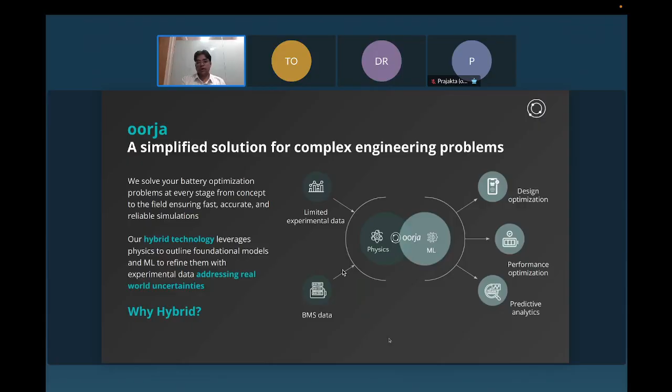And we started by solving it for batteries because batteries are one complex engineering problem where an interplay of a lot of physical phenomena happens. Be it the thermal characteristics of the cells, the structural design of the cells, or the electrochemical models of the cells, all of these combined together dictate the behavior of the cells, and that is where these models become very complex.

And we at oorja solve all these battery problems at various stages, be it warranty stage estimations, reducing the accelerated life testing for the cells, as well as initial performance calibrations and cell selections. For all of these things, what is important is that we have a good cell model, and for a good cell model, we need accurate parameters to represent the cell behavior. Today we are going to focus on the parameter estimation problem.

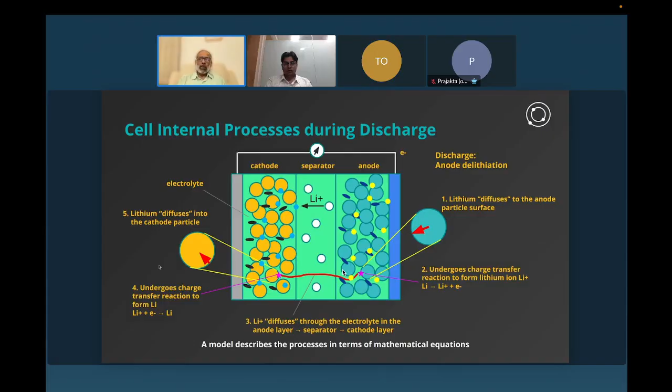What I'm not showing here is also the gradient that's set up by the potential or voltage gradient, and that also drives a similar transport process as shown here. So when we are describing these processes, this is where the model comes in, where the processes that we describe are now described in terms of mathematical equations. You set up equations for diffusion, you set up equations for reaction, and so on. And Prashant will cover in detail what these equations are.

So what is needed to describe this for a model? First thing we need are the material properties. If you look at the cathode side, one is the specific capacity. This is a property of the cathode active material. Another is the open circuit voltage on the cathode side. And then we need the component densities. We talked about the active material, the binder, and the conductive filler. We need the specific gravity or the density of all these components. So this is on the cathode side.

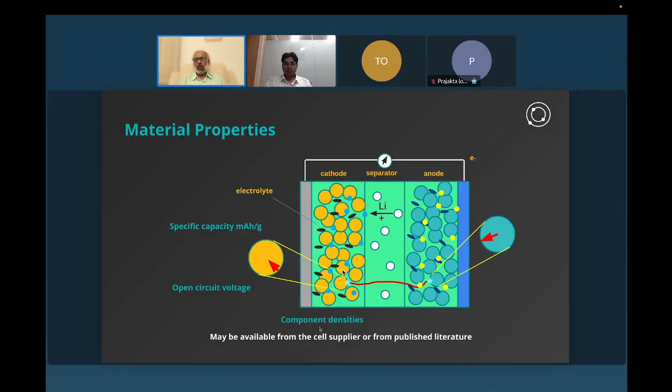Similarly, you need the material properties on the anode side. Where do we get these numbers? Knowing what these are, we can look them up, and the composite components here are definitely available from the cell supplier, or if it's a very standard cathode or anode formulation, you can get a pretty good guess at what they are and get the values from the published literature. So that's the material property.

The next are the design parameters. You need these for the model. These are inputs. What are the design parameters? To the left is the cathode, the particle size of the cathode. In case of an NMC cathode, it's typically about 10 microns. That's a design parameter. And then you have the thickness of the electrodes.

The cathode can vary anywhere between 70 to 100 micron. The separator, which is much thinner than the anode or the cathode, 15 micron. And the anode, typically for a graphite anode, is somewhere between 90 to 100 micron. So the thickness of the three components, the cathode, separator, and the anode, are examples of design parameters. We need to know them.

And similarly, on the right-hand side, you need the particle size for the anode particle, and the porosity, which is the white space in between the particles on each electrode, needs to be known, because when a cell manufacturer produces these cells, these are the set values. They target these values and they manufacture the electrodes, and hence the cell, with these numbers in target. You also need to know the composition of each electrode. What is the weight percent of the active material and the other components?

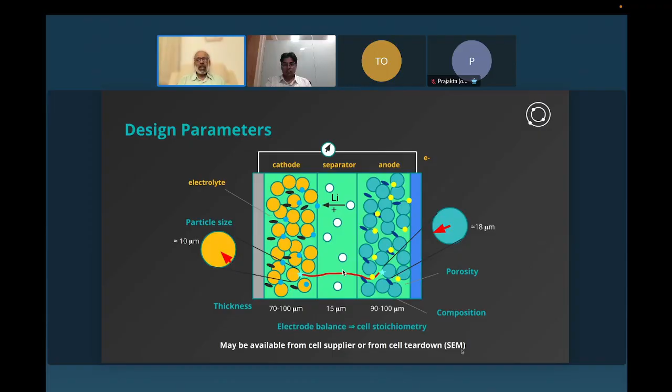So these are some of the inputs, and then going to the next slide, which is the focus of the presentation today, is the reaction and transport parameters. We talked about transport and we talked about diffusion. That's a transport process. And the diffusivity of the particle, diffusivity on the anode, is an example of a transport parameter. And similarly, we talked about reactions, and the reaction constant is a reaction parameter. So we have a set of transport parameters which consists of diffusion coefficients and a set of reaction parameters, which are the reaction rate constants.

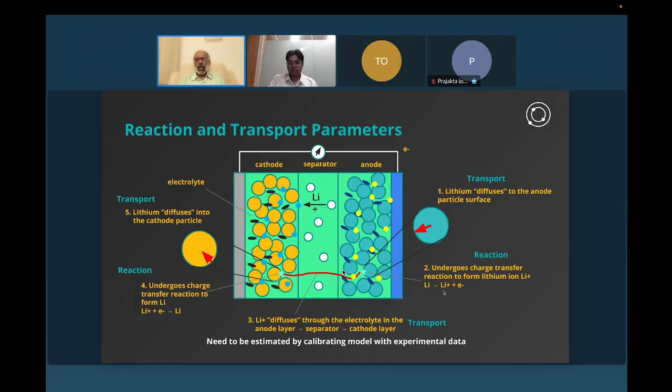These are not easy to estimate. There are reported values in literature, but we simply can't pick them up because they are very sensitive, very dependent on the chemistry and the design and so on. So these are typically determined from experimental data. And these are some of the things that Prashant will highlight in this presentation. So let's go to the next slide.

So if it's an electrochemical model, here are some of the key considerations, especially when it comes to using these models for quantitative predictions. The models we saw, the processes we described, are for simple charge and discharge within a cell. The electrochemical models are often extended to describe the cell degradation. You describe similarly various degradation mechanisms. It could be particle cracking, it could be SEI layer. You build equations describing these, and that then eventually becomes the life model that predicts the life of the battery cell.

You incorporate energy balance into these equations. Prashant will show the equations in a minute. And that leads to temperature predictions. And the model then can be used for thermal management. It can also be used for pack design, including the cooling strategy. So the accurate beginning of life model forms the basis for many models. And getting this model to be accurate is very critical. And the bullets below tell us the key requirements for getting an accurate beginning of life model.

Cell chemistry information: NMC is not good enough. We need to know what type of NMC it is, NMC 811, for example. Cell design data for that specific cell. We need accurate half cell open circuit voltage. This is very critical. And the third bullet item is estimation of the transport and reaction parameters we saw in the previous slide from the experimental data. Again, as I said before, there are values available in the literature. They are only ballpark numbers. If you really want good quantitative prediction, we need to estimate these for the cell at hand and not just rely on what's published in literature.

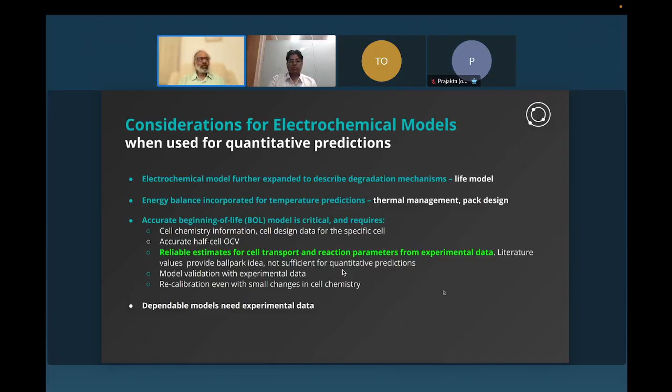Similarly, the anode and cathode undergo similar kinds of processes. And then you have the diffusion and migration happening through the electrolyte, which is sitting in the separator. Now, for all of these processes, one needs to know what is the diffusivity through each of these particles, cathode or anode. What is the diffusivity in the electrolyte? What are the reaction rates once the lithium ion converts into lithium by combining with the electrons? Or what is the reaction rate when lithium decomposes into lithium ion and electrons?

All of these parameters play an important role in describing the cell dynamics, and hence accurate estimation of these parameters is very important to understand, when the cell undergoes the charge and discharge process, what kind of response you would expect from the cell. Now, all of these parameters, like Dr. Raghu mentioned, can be categorized into two categories: cell design parameters and model parameters.

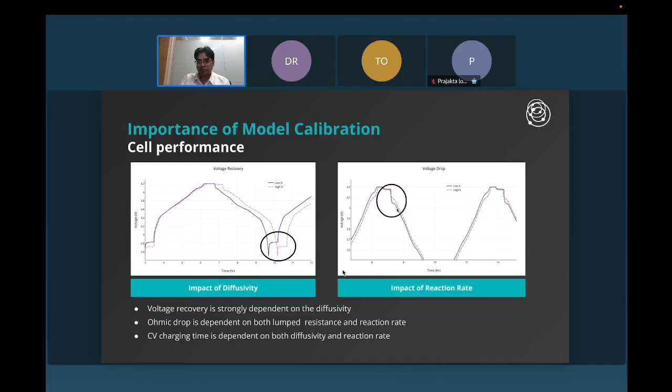And we at oorja have come up with an approach where we make use of the HPPC data to identify these parameters, given that the half cell OCPs as well as the design parameters are known to us. So, like we have seen earlier, inputs required for the model are design parameters, open circuit potentials, and the other set of parameters, as we have seen, are the transport and kinetic parameters. Instead of that, now the input here is HPPC data, and making use of this as an output, we are going to estimate those model parameters.

Now, HPPC data can be obtained by conducting the experiments on the cells that are going to be used, or there are sometimes these databases where you have HPPC tests conducted. But we would always recommend to conduct the experiments on a particular cell which you are interested in modeling, because whatever databases we have may not be the accurate representation for the cells that you are trying to model.

Now, one of the challenges with any experimental data is that the data comes with a lot of noise because of either the sensor measurements or something happening during the experiment itself. Now, that requires a cleanup of the data before we can make use of this data for optimizing these parameters.

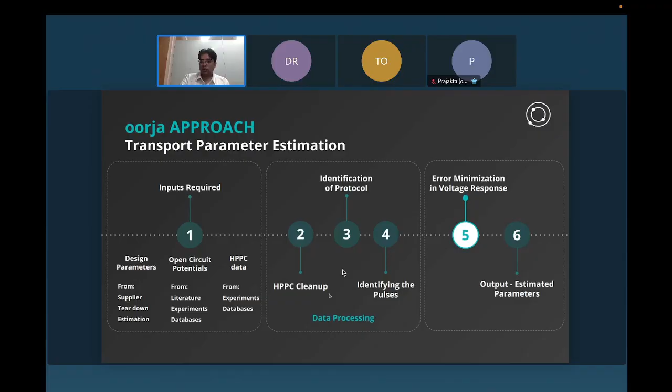So the process after we have uploaded the HPPC data together with the other parameters is that first we perform the cleanup of the HPPC data, and then for the HPPC data there are certain important sections that one needs to look at to understand the cell response, and that is where we have automated this process and we identify these protocols. And once we have identified the HPPC protocol, we also identify the pulse regions, because those are the ones which show us the cell characteristics. And then once we have pre-processed all this data, it is now ready for the optimization of these parameters to match the voltage response that we see experimentally to what we see from the simulations.

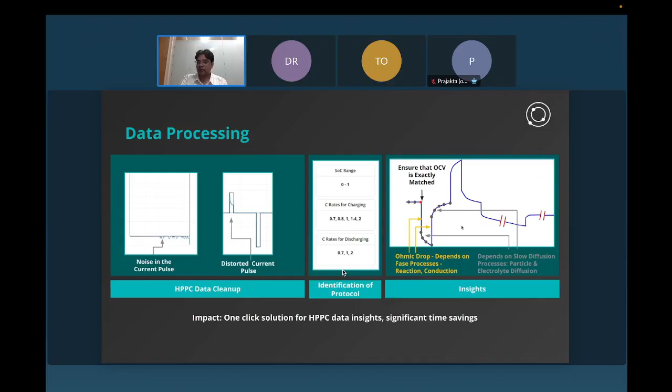So we at oorja have simplified this, and within a single click of upload of the data and just saying I'm just processing this data, you would get all of these insights, data cleaning done, and the data is also ready to be consumed during the optimization process.

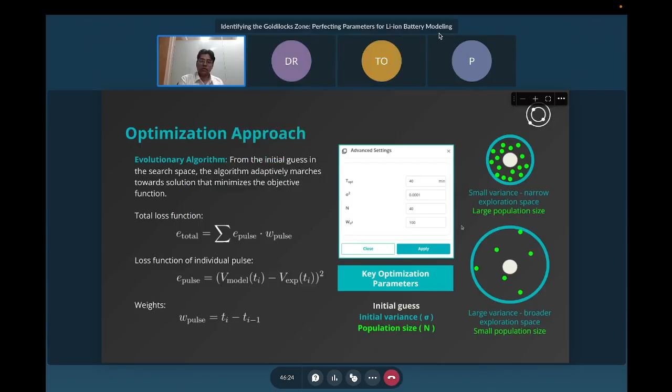Now, let me get into a little bit of details on the optimization approach that we have at oorja for the parameter optimizations. In this case, we are focusing on five of these parameters: the internal resistance, lumped resistance of the cell, two reaction rate constants on the electrode surfaces, and two diffusion constants. Now, that gives a set of five parameters, and as you would know, the more parameters you have for the optimization, the process becomes very complex and also challenging. And making sure that we have uniquely identified these parameters is a big challenge.

Now, what we do here is that we focus on each pulse. Now, the reason behind focusing on each pulse is that these pulse experiments are performed at a specific SOC. So you start with a fully charged cell, you do the pulse experiments, and then you slowly keep discharging the cell by 10%, and then do the pulse experiments again. Now, for each pulse profile, you will get a different kind of voltage response depending on the SOC.

What we do here is that we focus on the pulses at each SOC. We calculate the voltages from the simulation. We look at the experimental voltage curves. We get the error between the model and the experiments for that particular pulse. This is our overall error. And then we start weighing it because different portions of these pulses are important in different senses. Like I mentioned earlier, the lumped internal resistance of the cell and the reaction rates are important in deciding the initial voltage drop. And then there are the diffusion constants and reaction rates which decide the slower decay of the voltage.

And thus these errors need to be weighed appropriately so that we give equal weightage to the important aspects of these parameters. And once we have all these errors summed for a particular SOC, we minimize this error by subjecting it to the optimization algorithm. And we repeat this optimization process for the set of pulses at different SOCs. So in this process, we obtain the parameters at different SOCs by doing the optimizations on each of these individual pulses.

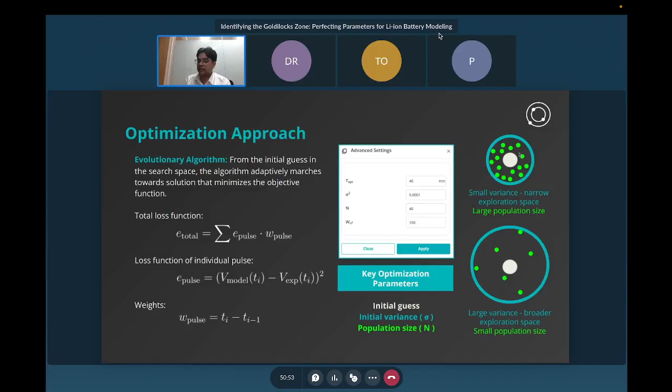within this zone. And if you reduce this variance, then it is going to try the values very close to the initial guess. And let's say you increase the number of initial guesses over here, then it will have much denser population within that bound. And the way it works is that for each initial guess, it tries to get the error in the voltages and finds the initial guesses for which the voltage is minimal. So it might identify certain locations for which the voltage was minimal. From there, it evolves further again in terms of optimization and keeps repeating this initial variance and initial guess process from there on to get to a global minimum.

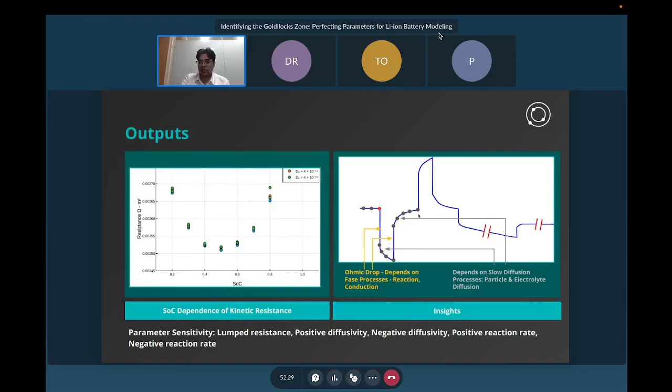Now, one of the important things again I want to emphasize is that we need to be also aware about the sensitivity of these parameters on the different parts of the voltage curves. So when I talked about this lump resistance and reaction rates, this is the part of the voltage curve which is sensitive to the resistance and reaction, and this is the part which is sensitive to the diffusivity and reaction rates, and then you have a recovery which is solely dependent on the diffusion process. Now, because there are diffusion constants for anode and cathode, each of these might have a different kind of sensitivity, which I will talk about subsequently when it comes to uniquely identifying these parameters.

But now that we have all this process in place, we want to use this optimization algorithm to actually estimate the parameters for experimental data. But before we get into that, we wanted to start by creating synthetic data. When I say synthetic data, it is a simulation response for the HPPC current profile. And we treat this synthetic data as experimental data for the optimization solver. So the optimization solver knows nothing about it. It just sees this as experimental data. And the idea behind doing this experiment is that we wanted to make sure that the optimization algorithms work well and estimate the parameters closer to the reference parameters that we started with.

Now, in this case, synthetic data was generated for an NMC cell, which is a 4.61 ampere hour cell. And these were the reference parameters that we started with. And as you would see, like in a typical HPPC profile, you have initially a charge pulse, and then you have discharge pulse and charge pulses, and then you reduce the SOC, and you repeat these sequences till you go to the lower SOC value.

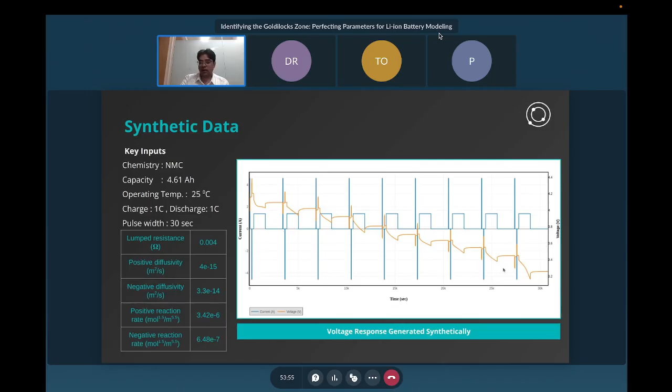Now, with this, we started with different initial guesses for the diffusivity, and here I have changed them by orders of magnitude, 4e-15 being the reference value. For all of these, if you look at the pulses, when we optimize it, each of these could capture the voltage profile during the pulses accurately. And that establishes that even if you are far off from the initial values, you will be able to capture the voltage profiles through the optimization process.

Coming to the non-uniqueness part, while we were doing this exercise, we also realized that when we optimize these parameters, the sets of parameters that we obtained, depending on the different initial guesses, were not all close to the target. And that essentially tells that even though we could capture the voltage profiles on the pulses, there are different sets of parameters that can lead to the same kind of voltage profile. Now, how do we believe that the parameters that we have estimated are the parameters that represent this cell accurately?

And also a bit more insight into why we were having huge variations in our estimated parameters with the different initial guesses. What we saw was that the diffusion at the negative electrode and the positive reaction rates were very insensitive to the voltage response. So we tried varying these parameters and we could see that the voltage response was not changing.

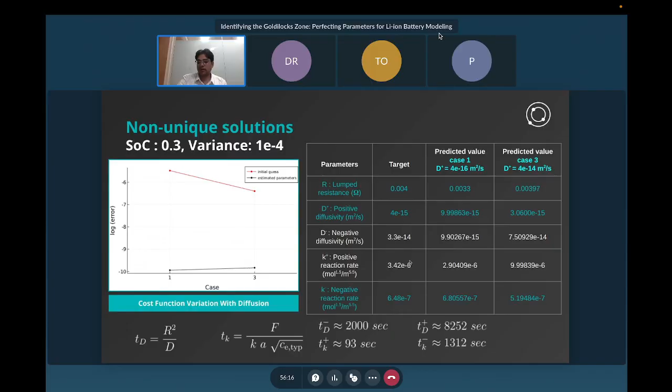And primarily voltage response depends on the time scales of these processes, and we calculated the time scales for the reaction rates and diffusion constants, and we could clearly see that the time constant for positive electrode reaction rates as well as the time constant for the negative electrode diffusion were much lower compared to the counterparts. And that is what establishes that these parameters are going to be much less sensitive in dictating the voltage response compared to the other sets. And that is the reason for a significant variance in these parameters.

Now, in order to ensure the uniqueness, what we also did was, instead of just optimizing the parameters on one single C-rate HPPC data, we created the HPPC data for 1C pulses as well as 4C pulses. And we did the optimizations on both of these cases by varying the initial guesses. And finally, we will end up with a set of parameters that are capturing these voltage profiles.

Then what we did was we started matching which sets from these two experiments match closely. And we could find that for an initial guess of D plus 4e minus 14 for 1C discharge, and for 4C discharge, D plus 4e minus 15 initial guess, they both led to parameter estimates which were close enough. And we also could see that they were close enough to the target value.

Basically, with this, what we established is that if we repeat these experiments at different C-rates and do the initial guess variation exercise, we have a possibility of still getting to the unique solutions, even if we know that some of these parameters might be insensitive and so they cannot be unique sets to capture that voltage profile.

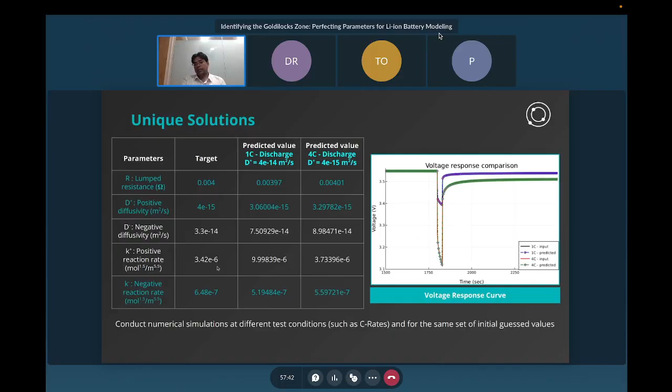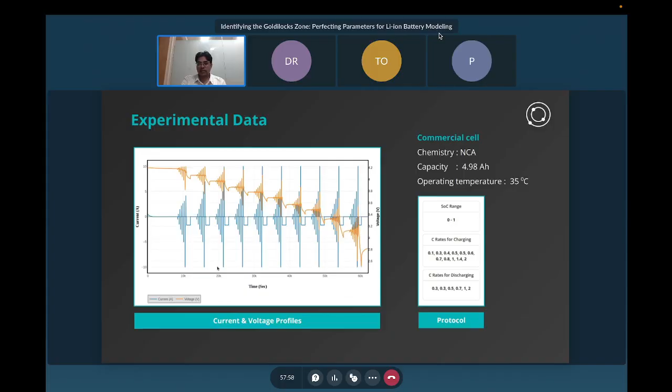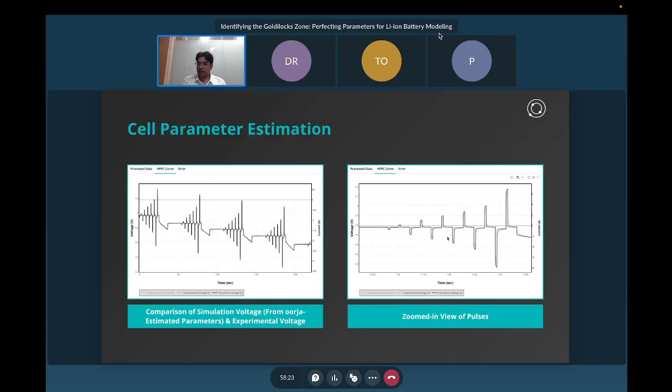Now, after doing this exercise, we actually took commercial cell experimental data and we repeated all of these exercises. And here you would see that there are so many charging and discharging pulses for optimization. And with this also, we could show that apart from looking at the overall HPPC profile, which is exactly matching, overlapping over each other, we could also match the responses over these pulses. So this is the zoomed-in view of these pulses, and we could match the responses from our simulations by doing the parameter estimations with the actual experimental response.

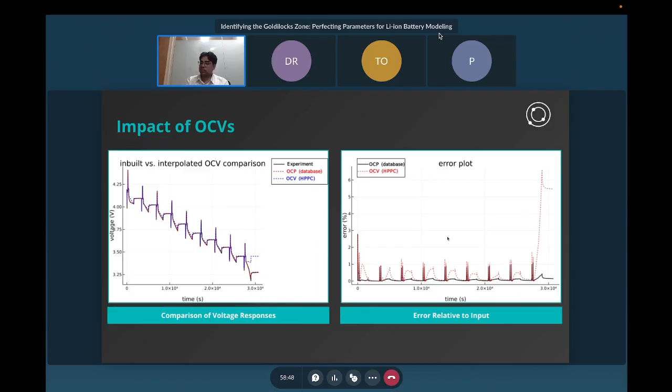Now, with this, we have established that the optimization algorithm works, and we have a possibility of getting the unique set of parameters despite having multiple combinations giving the same kind of voltage response. One more thing which I want to highlight here is that it is very important to get the right OCPs for the electrodes to estimate these parameters accurately.

Here we ran some experiments where we were looking at the OCVs from the HPPC data. When I say OCVs from the HPPC data, you have a sufficient rest period over here, and we looked at the voltages here and then used them as OCV values at that particular SOC, and then in between we did linear interpolation for the open circuit voltage curve. And when we ran the optimization with this linearly interpolated OCV curve and obtained these parameters, we could see huge error in these pulses while identifying these parameters.

And when we actually switched to the actual OCP values from the experiments, the error was far lesser. And that also establishes the importance of having the right set of OCP curves for the electrodes before we get into the parameter identification. Otherwise, the identified parameters would be far off from what we expect these parameters to be.

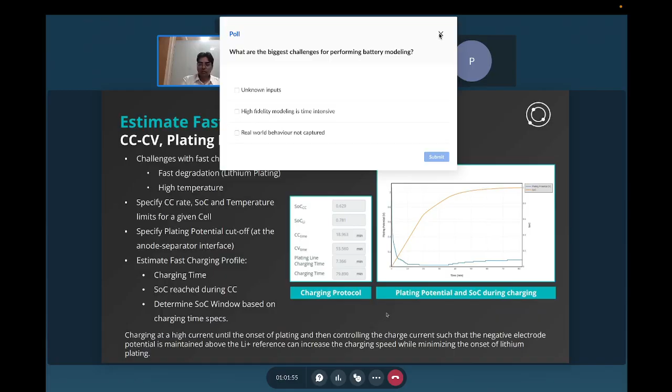Right. One of the other applications that is very important to highlight here, for the beginning of life parameters to be very accurate, is the degradation models, because we saw those beginning of life models and the set of equations over there. They are a precursor to any degradation models when it comes to electrochemical modeling of the degradations. And unless you have those base equations right with the right set of parameters, which is representing the cell behaviors accurately in the beginning of life, whatever degradation estimates you come up with are going to be erroneous because you have not mapped the cell performance well.

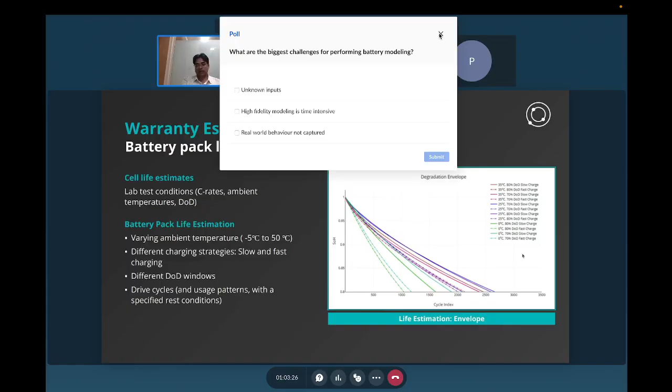Now, we at OSHA also have the optimization algorithms for mapping these degradation rates, be it SEI layer growth, lithium plating, particle cracking, or loss of active material. And one can run the optimization algorithms after making the initial model calibrations for the beginning of life to also estimate the degradation envelope that you see over here for the different conditions. And this can be run for different drive cycles as well. So it is not only for the constant charge discharge C rates, but one can use the real world drive cycle to also simulate the state of health as you cycle during this process.

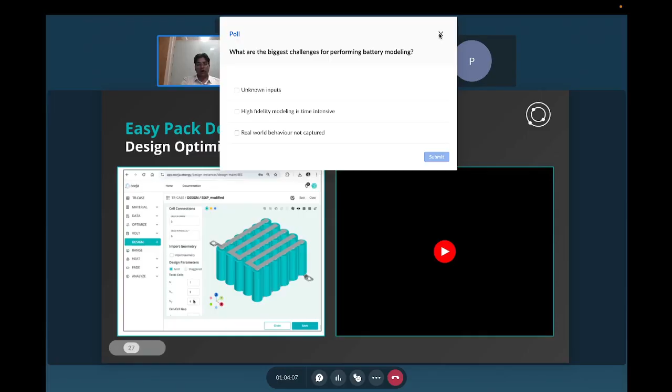Other than cell modeling, I just wanted to highlight another capability of OSHA, where one can quickly turn these cell models into simplified pack models and run quick design of experiments to optimize the battery pack performance as well. So without taking much time over here, it is just a quicker way. Instead of just doing the CAD modeling, one can easily set the number of cells in X and Y directions or Z directions, or the electrical configurations, and all of these connections get set very quickly.

Today we talked about the cell modeling, of course, where the parameter estimation was the highlight, but OSHA caters to applications for the entire cell life cycle, where you start by doing the cell selections to cell designs and then degradation and thermal performance estimates, as well as range analysis, to also qualifying these cells for safety. All of this is part of the OSHA suite.